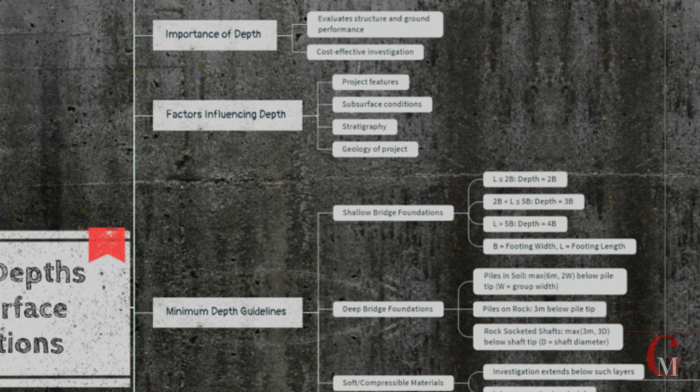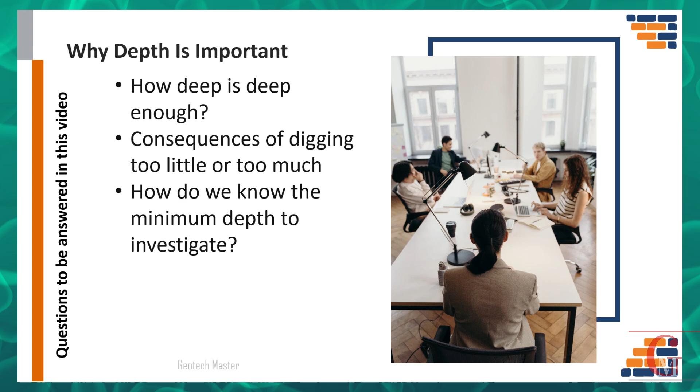Have you ever wondered, when you start a site investigation, how deep is deep enough? What happens if we don't dig deep enough, or if we go too deep? In this video, we will answer questions such as, how do we know the minimum depth to investigate? And what are the rules of thumb for determining the depth of borings for different structures? Believe me, these questions are fundamental to have a good and cost-effective investigation program.

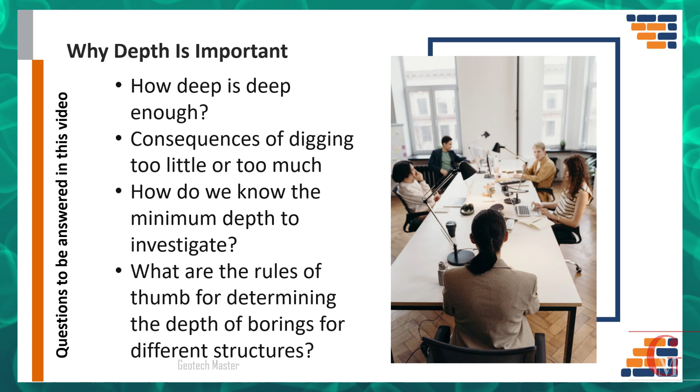Before we jump in, let's quickly recap what we covered last time. Remember, we talked about key factors such as investigation objectives, project features, subsurface conditions, anticipated uncertainty, and access constraints that impact how we choose the number and location of our tests and boreholes. Now, we are going to see how these factors also influence the depth of our investigations. If you haven't seen that first video, I recommend checking it out. I have provided the link in the description for your convenience.

Alright, let's get started. When we are planning our investigation, the depth of our investigation is another important consideration that is impacted by the project features. For example, our investigation for a bridge needs to be deeper than for a roadway pavement because they have different performance requirements. The depth of investigation should be deep enough to evaluate the performance of the structure and the ground under it.

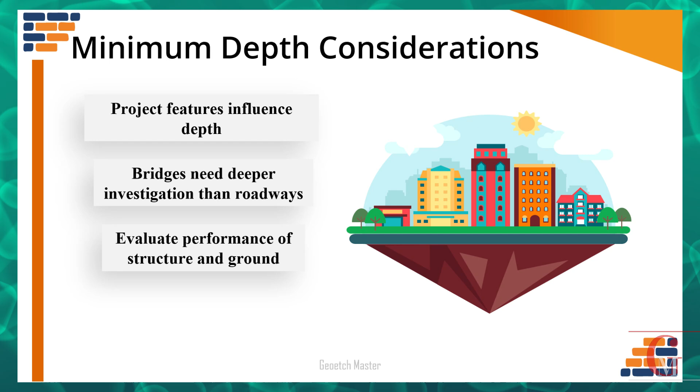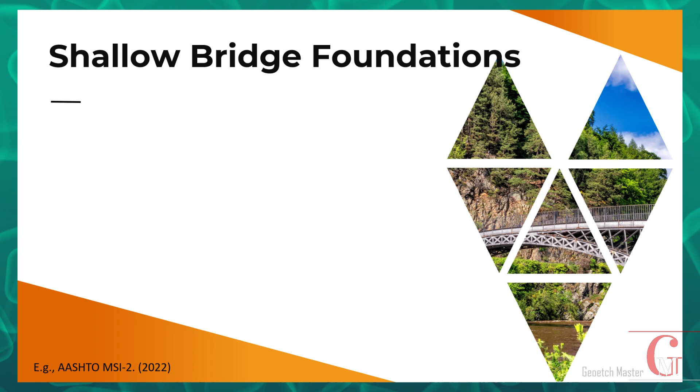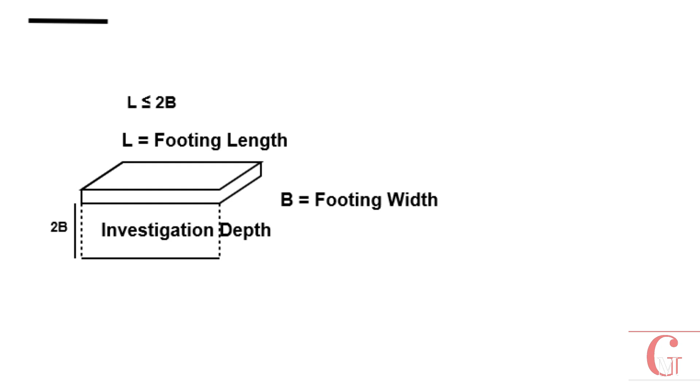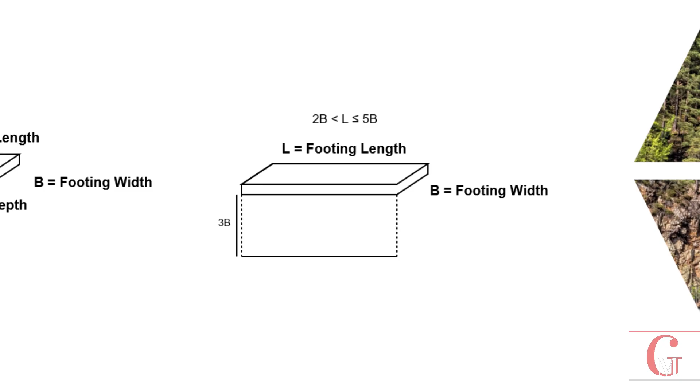Let's look at some specific examples of how the project feature will determine the minimum depth of investigation. For bridges with shallow foundations, we usually go at least 2 times the width of the footing if the length is less than or equal to 2 times the width. If the footing is longer, for example, 2 times the width is less than the length, which is also less than or equal to 5 times the width, we should go at least to a depth of 3 times the footing width. If the footing length is greater than 5 times the width, then the minimum depth is 4 times the width.

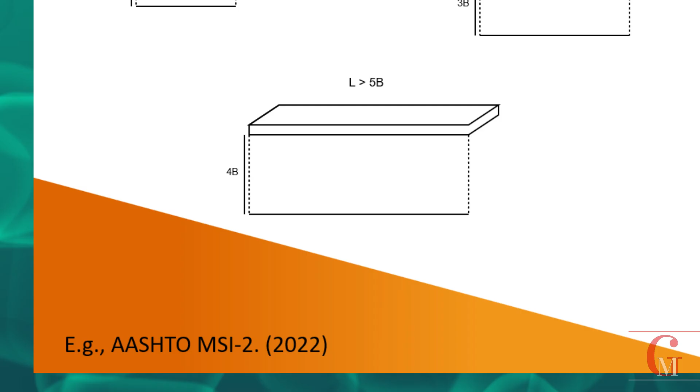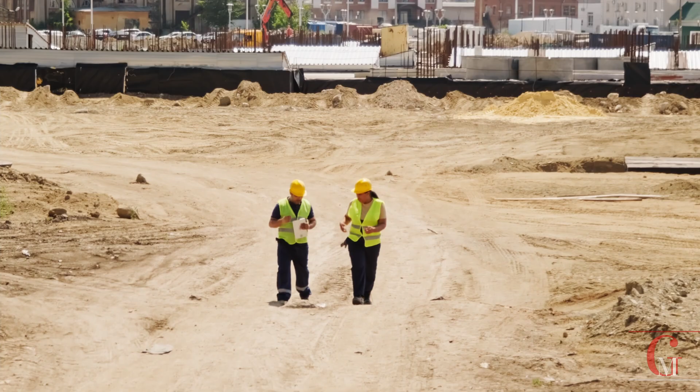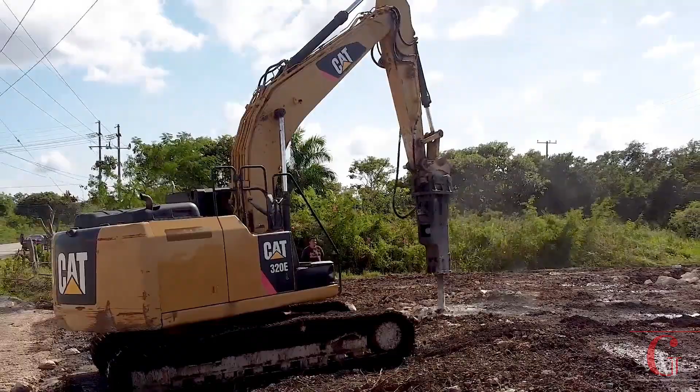This will make sure that we are investigating deep enough for shallow foundations. When determining the minimum depth for subsurface investigations, it's crucial to consider the presence of soft or compressible materials. The investigation should extend below any such layers and into a competent material. Additionally, if rock is encountered before reaching the depth determined by other criteria, such as multiples of footing width, the investigation should extend a minimum of 3 meters into competent rock. This ensures that the investigation goes beyond problematic materials to reach a stable and reliable stratum.

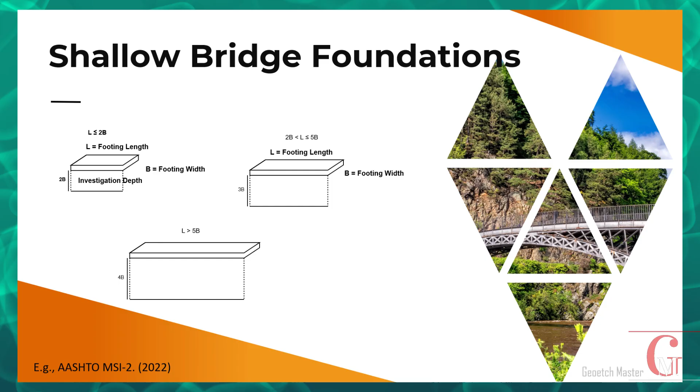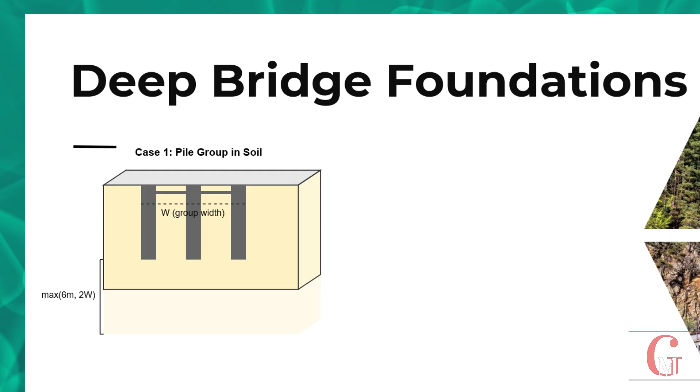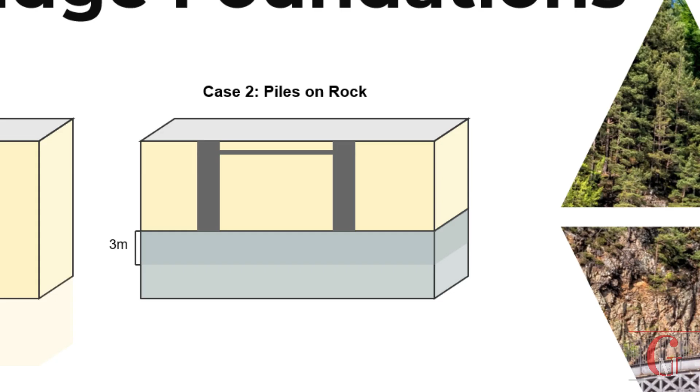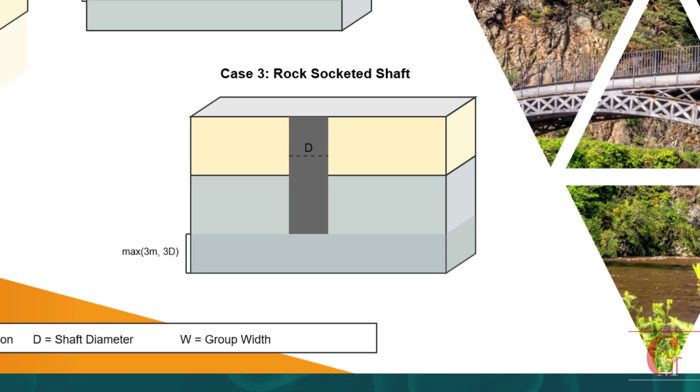For deep foundations such as piles, we go at least 6 meters or 2 times the maximum group dimension below the pile tip, whichever is greater. And if we are dealing with piles on rock, we should extend our borings to a minimum of 3 meters below the pile tip. For rock-socketed shafts, borings should extend below the anticipated shaft tip a minimum of 3 meters or 3 times the shaft diameter for isolated shafts, or 2 times the maximum group dimension, whichever is greater.

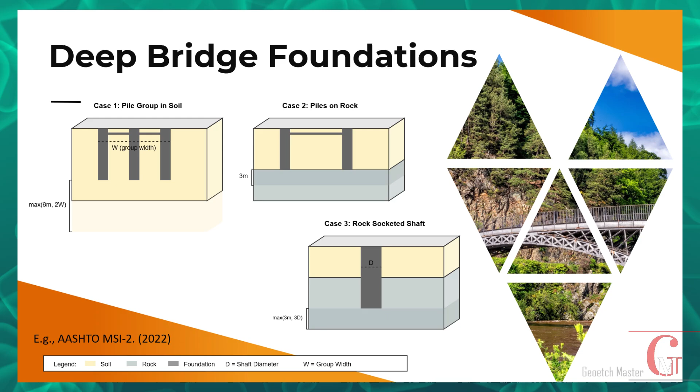It is important to note that these depths are just starting points. We also need to consider the subsurface conditions and stratigraphy. It's always important to go beyond any soft or compressible layers and make sure we have a good understanding of the geology in our project.

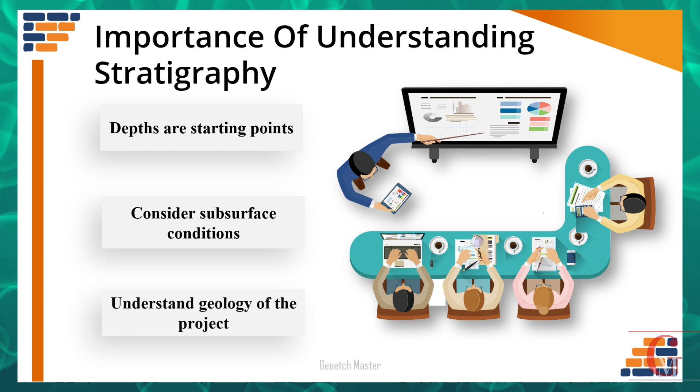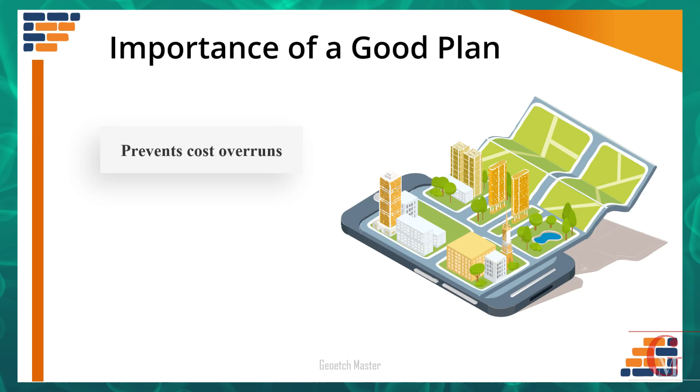Again, let's summarize those points. As mentioned, the depths of our investigations are determined by the type of project feature and also the subsurface conditions. Remember that the values in the guideline tables are for guidance and can be adjusted based on the project. A well-planned investigation that includes proper depths will prevent cost overruns and will help us to have a more realistic design. It's important to have a plan that is both practical and effective. Remember, a well-planned investigation saves us time, money, and potential headaches down the road.

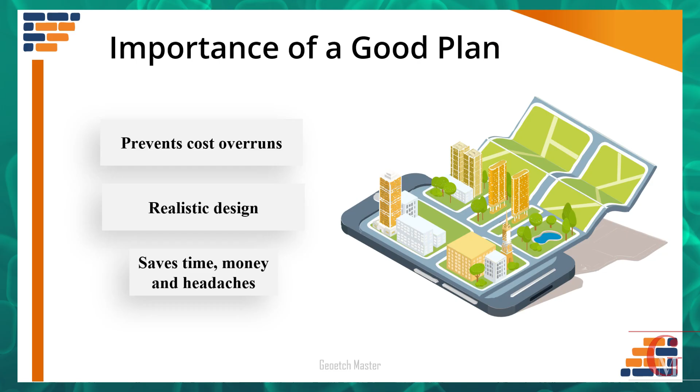So, that is it for this video all about minimum depths for subsurface investigations.